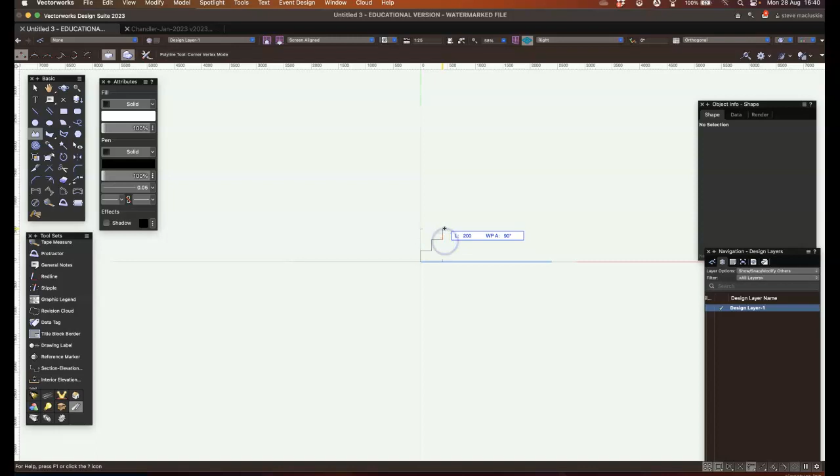200, 200, 200, 200, 600, and back. So let's zoom in a little bit, and then I'll extrude that by a meter, and that gives me the model that we're going to be working with.

That's all the drawing done there on design layer 1. Okay.

I've made a sheet layer. You can copy the sheet layer from the previous tutorial when we did sheet layers, or you can go back onto that again and create the sheet layer organization.

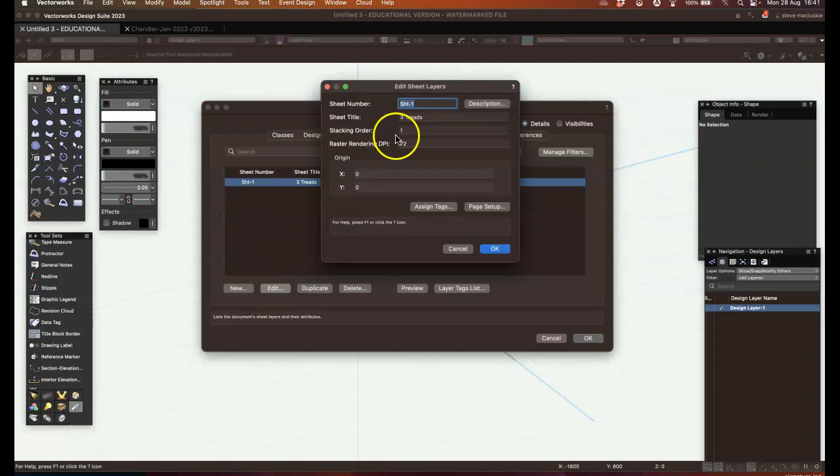But for the sheet layer there, if I edit that, it was page setup, 1 printer page, A4 essentially, and then I went back and I did the...

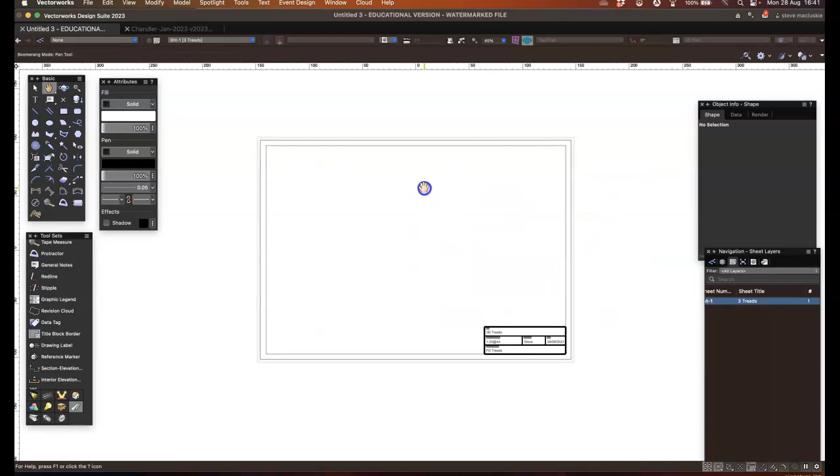If I click on that, click on the sheet there, then we should have the sheet layer there, the empty sheet layer with the 5mm border and some information down in the title block, exactly the same way as we did before.

Go back to the design layer. So what I'm going to do now is create viewports, and remember we had multiple viewports of the same thing in an earlier screencast, so I'm just doing the same thing here.

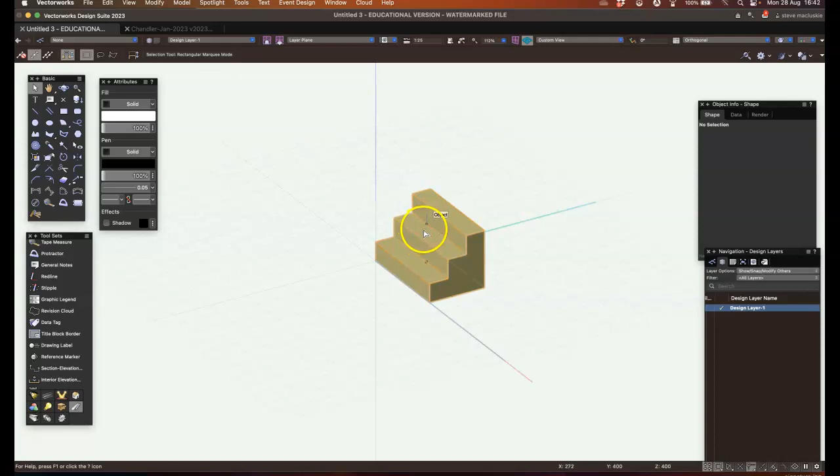What I'll do is top plan, so the top plan will be my first viewport. I'm going to do View, Create Viewport. This time I'm going to uncheck these two little tick boxes here, which were the information below each viewport.

Because it's going to make my drawing quite messy if I have those, I'm going to uncheck them. We're going to create it on the layer Sheet 1, which is 3 treads, the only sheet layer I have.

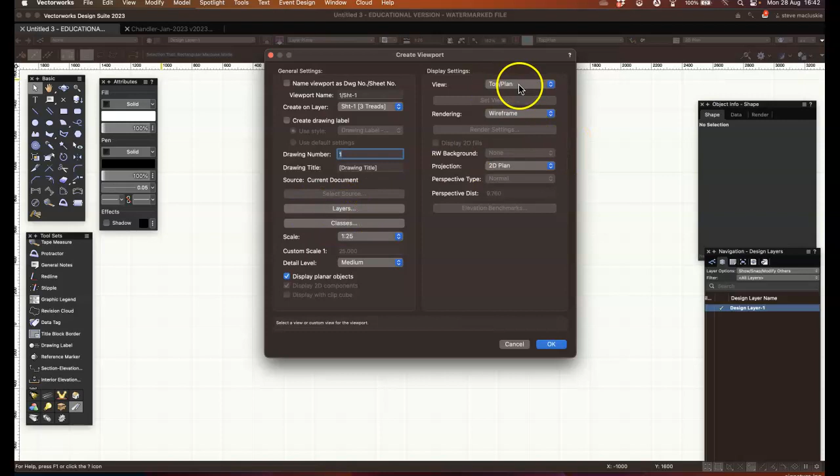We don't have anything complicated to do with layers like I showed you before. It's a top plan view and it's wireframe, so that's fine. And that plops that top plan view right there in the middle of the viewport. Again, we can look over here.

It's a 1 to 25 plan viewport. If you don't know what third angle projection is, I suggest you type that into Google, third angle projection.

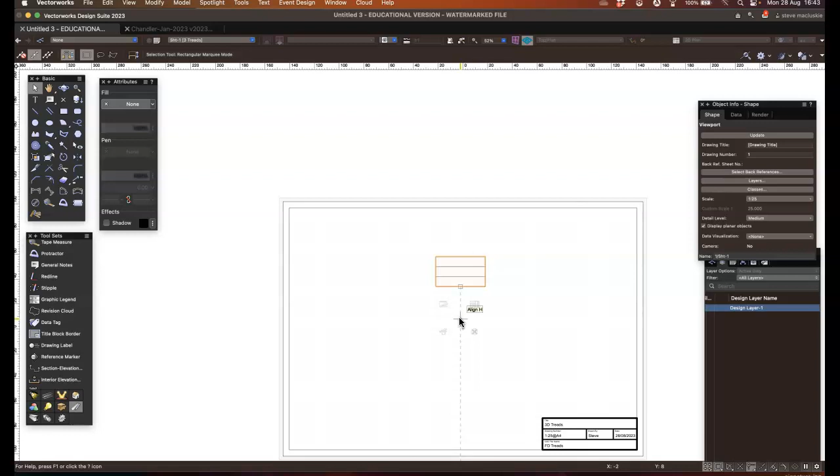So what I'm going to do is Command D, remember the duplicate command, and that places another viewport, another top plan viewport, and I'm making sure that I've got things all lined up.

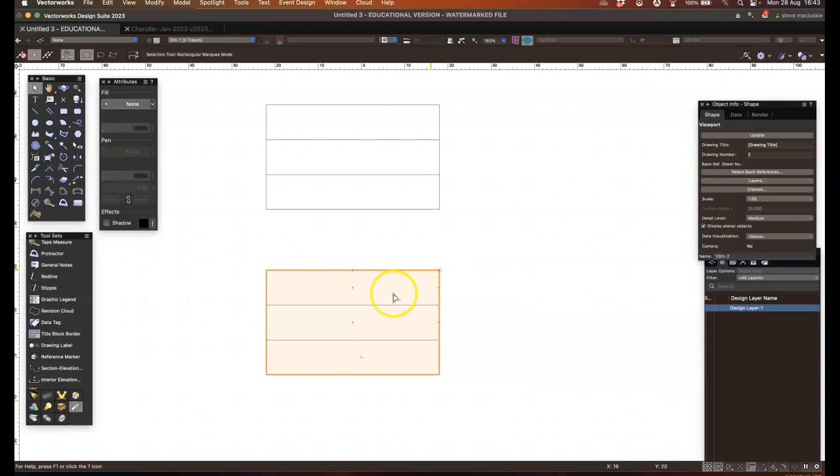So it's actually sometimes easier to pull it away and then grab the end, hover it over, then pull it down. I don't want that to be the top - this one, following third angle projection, will be the front. So I don't need to go back to the drawing again.

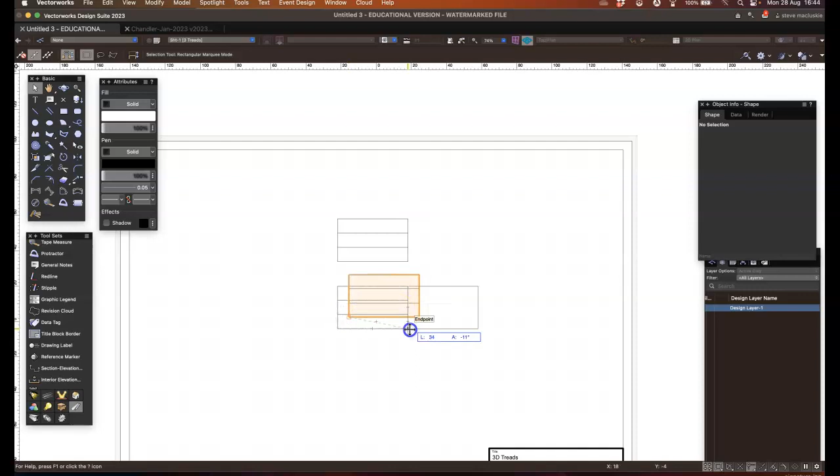I can just change the view here from top plan to front. It'll look exactly the same for a 3-tread, which is maybe a little bit confusing. I can duplicate that viewport and place it out to the right.

So I can align it up there, place it out to the right, and I won't have it as the front - I will have it, unsurprisingly, as the right. So that view there is the right view of the side. That's the front, that's the right view, and that's the top.

And then I'll duplicate that viewport, take it to the other side, and again, unsurprisingly, I don't want that to be the right - I want that to be the left. And that's third angle projection.

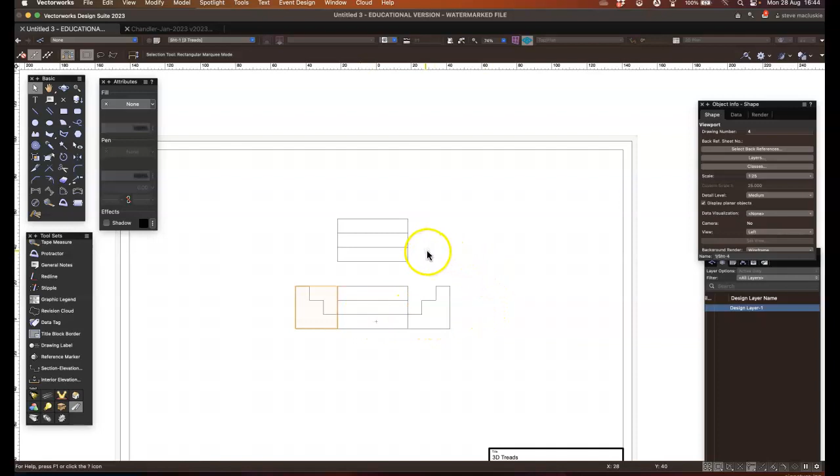So the way third angle projection works is, if you could imagine we cut this out of a card, this is the front face - these two faces would fold back, and if I put that right on top, that would fold back as well.

So this would fold back, and these would fold and fold, and that would allow us to make up a kind of an object from card or something like that. So it's just a convention. Everything must be lined up when you come to presenting your...

Vectorworks file - I want to see everything lined up. See that red dotted line? Everything's lined up there, and the vertical lines here.

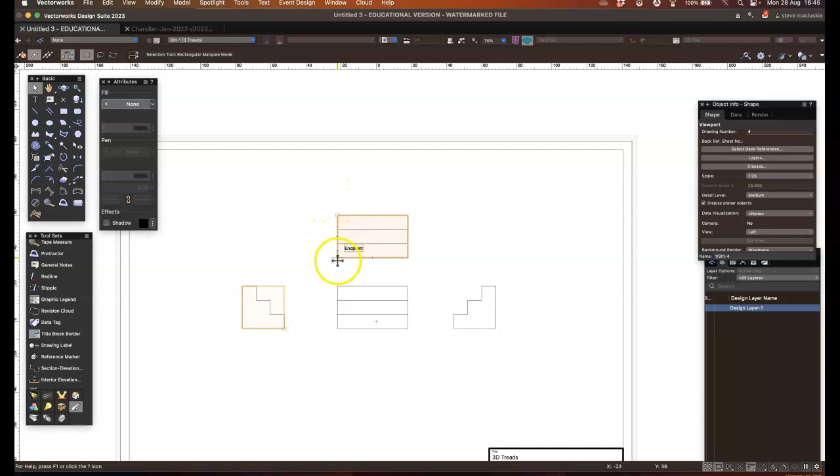See the green line? It's all lined up—critically important. Let's do one more. We'll duplicate that. It doesn't matter which one you duplicate, because you're only duplicating the fact it's a viewport, not what it is. I'll change that to right isometric.

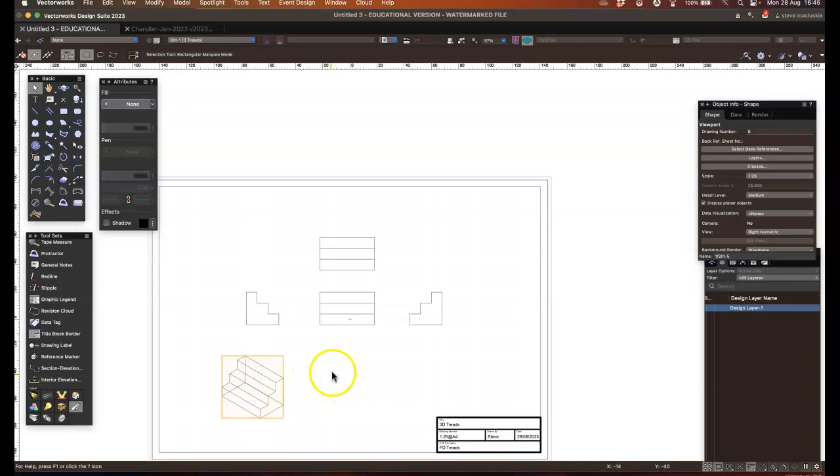So we can have that down there as well to help our viewer understand. That's our technical drawing laid out.

What we want to do now is annotate, so dimension things. Double click, and I'll use my constrained dimension because there's no angled lines here, and I'll pop in the height, the width of it, sorry.

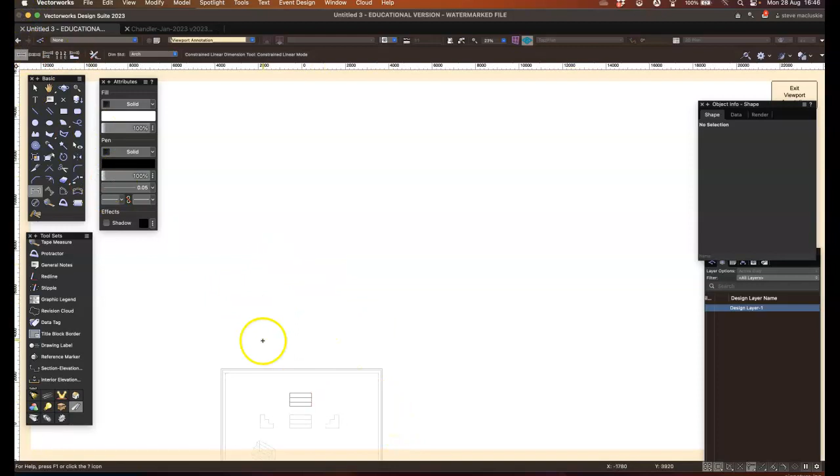I got that wrong there. I had chain dimension on, I wasn't paying attention. I'll just zoom back in there again to make it obvious. So, ensuring you have the right tool, single constrained dimension, click, click, click, done. Exit viewport.

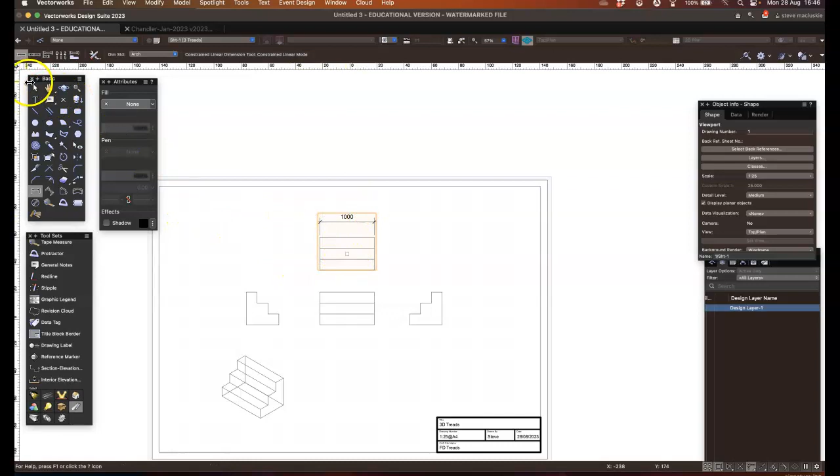It's really important to dimension within the correct viewport. I'm going to dimension this one using the chain dimension. So this one here, I will choose the chain dimension this time. And just for practice—I probably wouldn't do this in reality—I'll click, click, and double click.

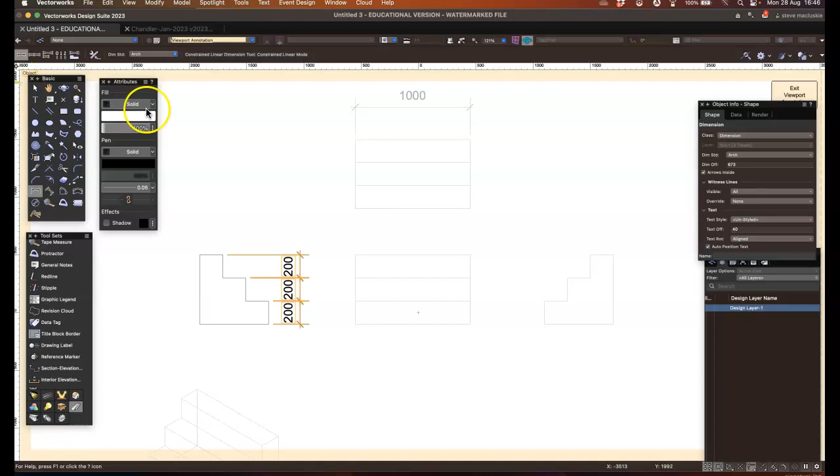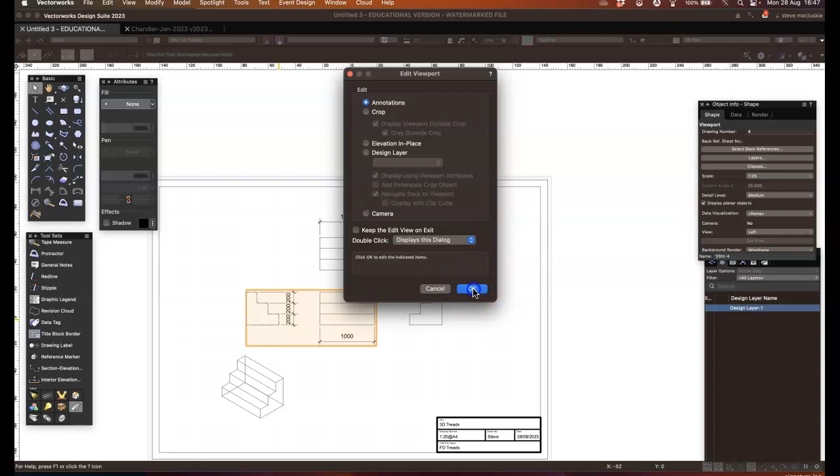Now what I was meaning by dimensioning within the right viewport: if I'm not paying attention, I'm going to do something wrong here and get carried away dimensioning this, and then exit, and you'll see that 1000 along the bottom there is associated with that viewport. That's wrong. It's one of the first things I check when you send me your files, so make sure you've only annotated within the correct viewport. That one has no business there, because we're only dimensioning this left one here.

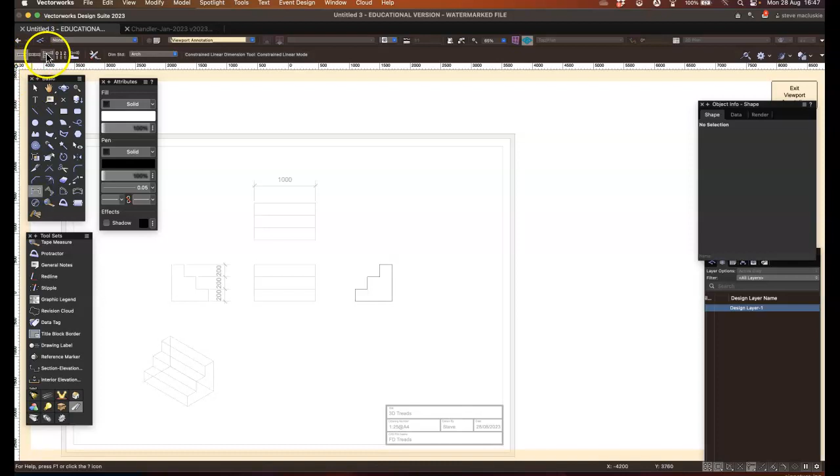For this one, I'm going to double click, go in and annotate, and again just for practice I'm going to do the baseline dimension. In fact, we'll do the top, so we'll do the baseline dimension this way, double click there, and exit. And this one here, rather than leaving it wireframe, we can scroll down and see where it says background render.

So shaded will give that shaded look, and remember, when it has the zigzag around the outside of it, it just needs updated.

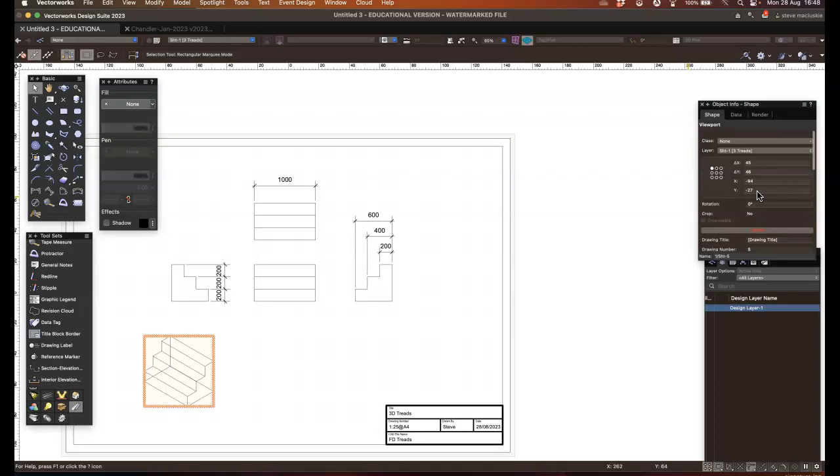If you look at that and it's a little bit fuzzy—I think in one of the previous tutorials I mentioned that we'll explain why that's fuzzy. Well, here it is. This is the explanation.

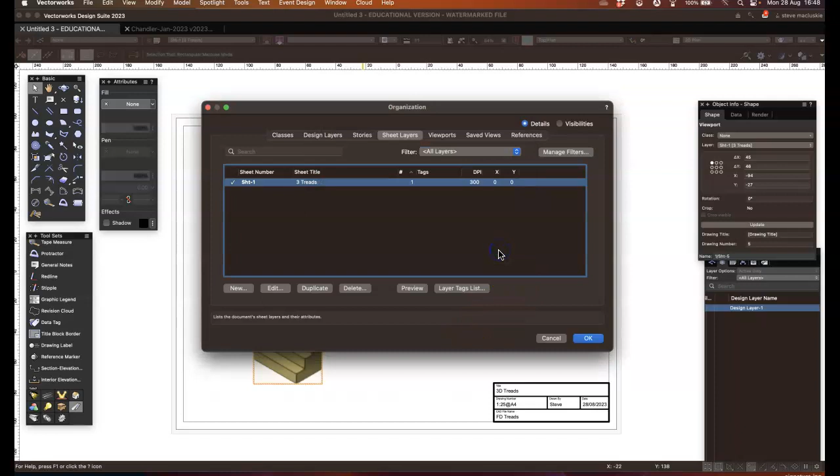If you go back to Tools, Organization, and into the Sheet layer and Edit, back here we had a raster rendering DPI, dots per inch, of 72. Pop that up to something like 300, which is way more than it needs, and then come back out and update, and you'll have a nice crisp

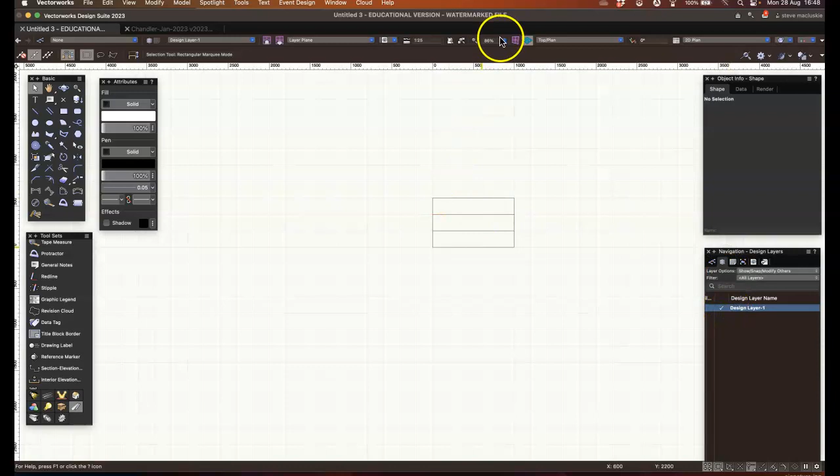isometric drawing there. What we're going to do now is one extra little bit. We're going to go back into the design layer. I'm going to spin that round to a right isometric view, and I'm going to draw a circle. I'm going to set align working plane with current view.

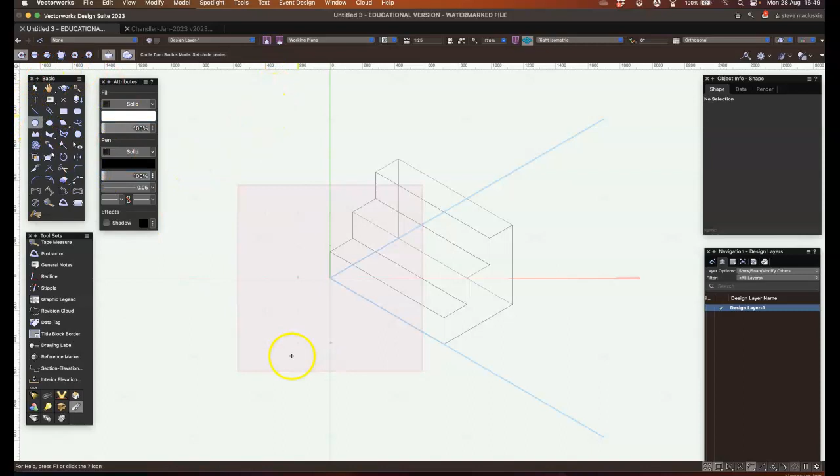So if I click that, the working plane is now glued to the back of my screen rather than the floor that the treads are sitting on. It will make sense in a second. If I draw a circle now, the circle is there and not on the ground, on the stage floor, on the piece of paper, if you like.

The reason I'm doing that is because I can then do View, Create Viewport, and it says do you want to use the viewport's crop, or do you want to use the object as a crop? Yes, I do. And I'm going to call this one zoom in. Zoom in, and I'm going to go OK and put it on the same.

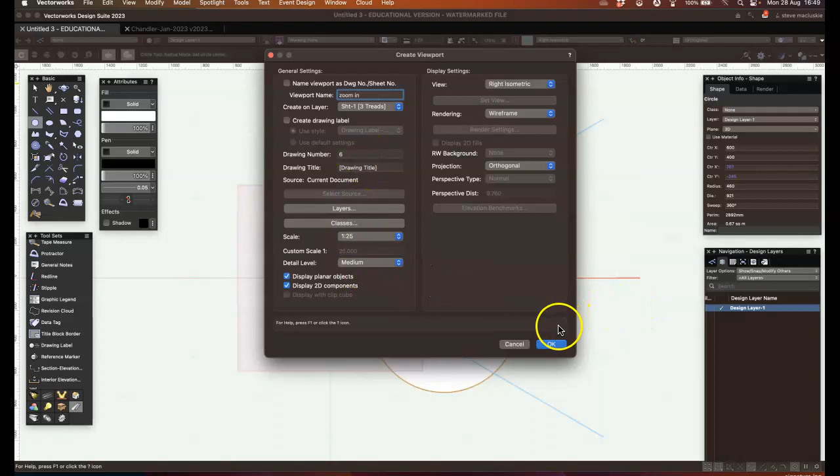So what it's done there is it's zoomed in on the detail on that corner, and it used the circle as a crop. I can change this, make it even bigger, like that. Again, might seem a bit weird at the moment, but you can see.

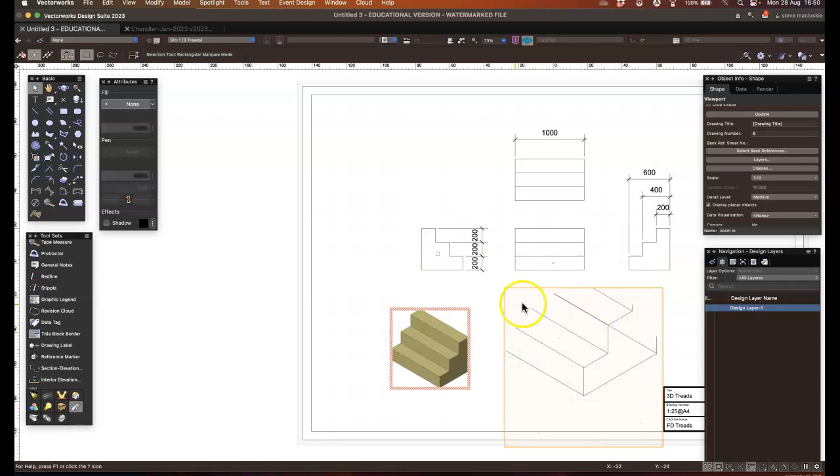Let's give that a shaded render as well, and update—View, Update All Viewports. If I don't want to go and click the update button, just move that one out the way. The reason I was doing that is because I want to go back and show you one more thing.

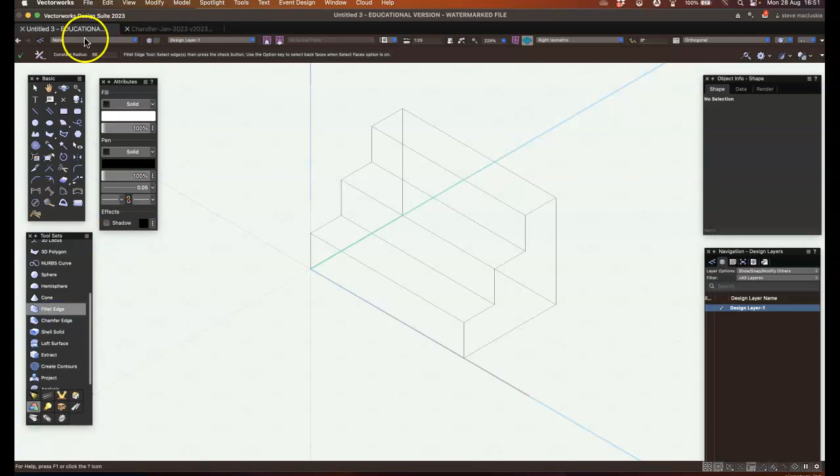So if I go back into my design layer again, I've got a different scaled viewport there with some sort of detail. Say I decided to change my set of treads and give them a filleted edge—along these edges here—so we've got treads with a rounded nose on them, probably very, very dangerous. But again, that's that. So I've done the 3 rounded noses.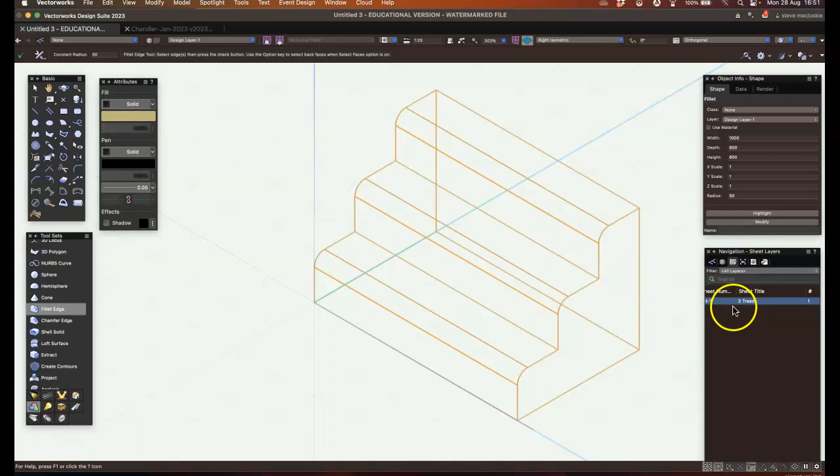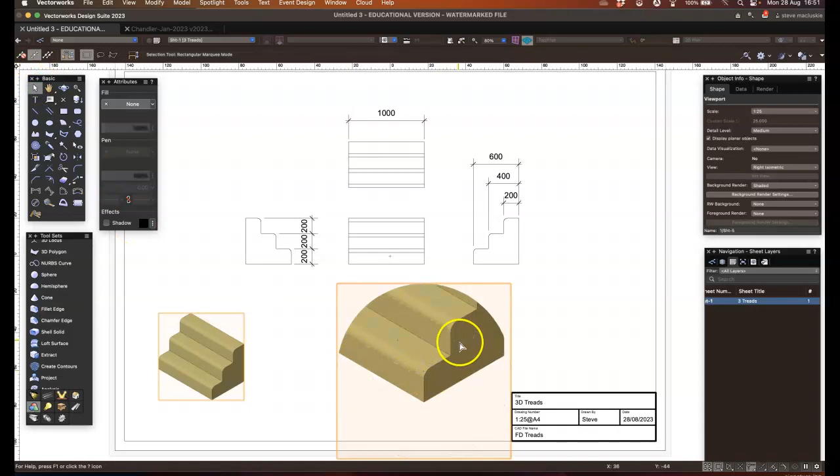If I go back to my sheet layer again, you'll notice that the left, the right, the front and the top, and these 2 rendered viewports—View, Update All Viewports—have all changed. So it doesn't matter though. That is one of the main reasons for drawing in Vectorworks: the fact that if you change anything back in your design layer again, it will pull the information back into your technical drawing.

So hopefully that was a good demo. It was a little fast, I know, but you can go back and pause parts of it.